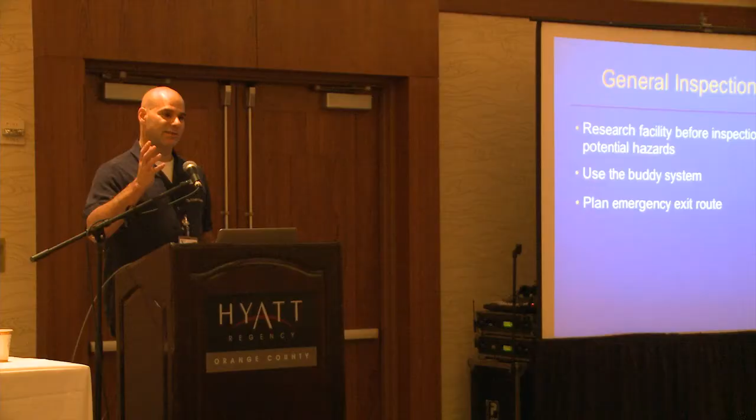My name is Victor Morales. I work for the Long Beach Fire Department. I am a hazmat specialist, business emergency plan inspector, CUPA inspector, and fire code inspector. We're going to continue with the APSA and fire code requirements.

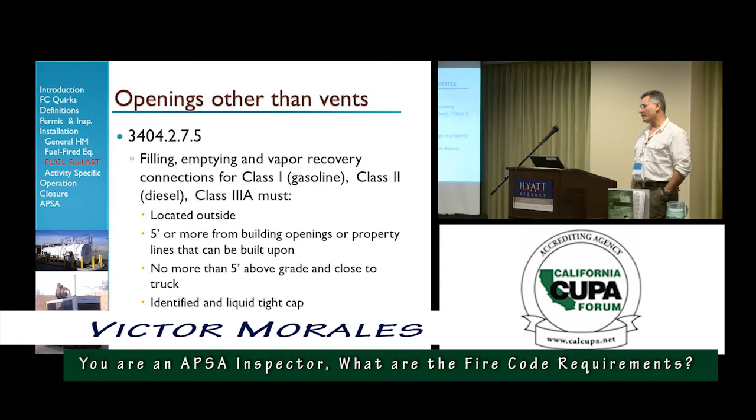Prior to starting my presentation, I would like to ask how many people here do actually perform APSA inspections? Oh, wow, quite a bit. And out of those that perform APSA inspections, how many of them normally work with fire code or issue fire code violations? Very few. Well, there are overlaps on APSA and fire code, but before going on, I would like to explain a little bit how the process works.

When you have a facility and they are going to install a tank, you have to understand that they need to go through a process, and that process requires fire code plan check. It will require a permit, just like Robert explained before. It will require those checks and permits, and then there will be installation, operation, maintenance, and testing. That is what the fire code does. And this is the big document, Fire Code 2010, that we follow.

There are specific chapters that apply to aboveground petroleum storage tanks. The way the fire code is written, they reference out different sections of the fire code. So, chapter 34, which is flammable combustible liquid storage, will say the design and installation has to comply with other chapter requirements or other standards as they see fit. Okay? Just to give you an idea, we jump around, section 3404.2.7.5, and you're like, whoa, what is that? Well, it's the specific sections that the fire code provides for everything: installation, operation, testing, design, etc.

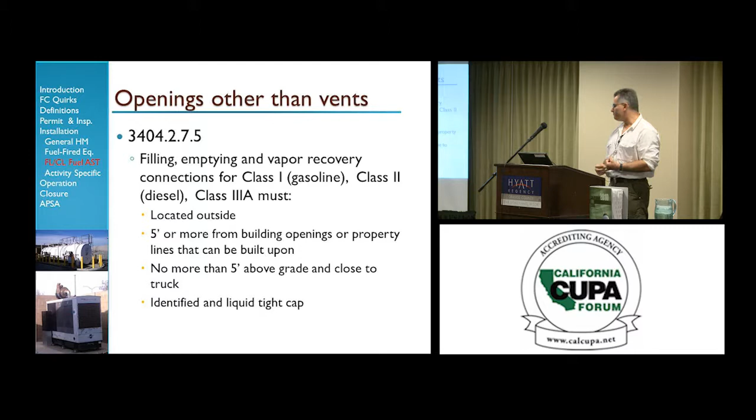Openings other than vents. As you can see, any aboveground petroleum storage tank will have a number of elements, ancillary equipment, not only the venting. It will be filling lines, piping, return piping that goes in and out, etc. All those elements are addressed in the fire code, and defined in several sections. These are the sections that we have.

Where's my pointer? Do I have it here?

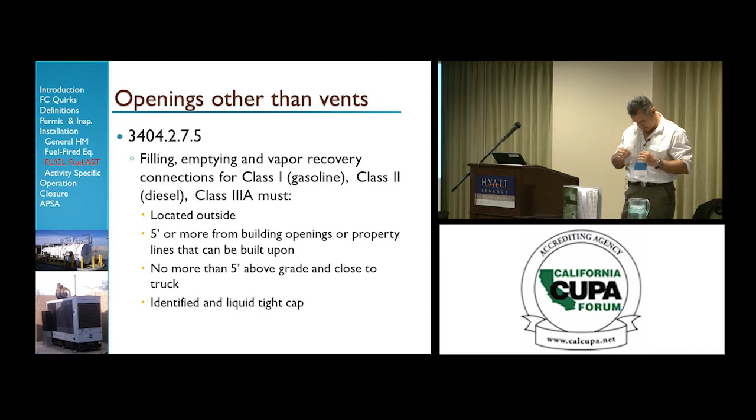Okay, thank you. These are the sections that we name throughout the presentation, and that's where you're going to see information regarding the specifics of the tank that you try to address. So, other than vents, you have filling, emptying, vapor recovery, connections for the type of material that you have, and these are the requirements.

Located outside, they have to be 5 feet or more from building openings or property lines that can be built upon, like Robert said. No more than 5 feet above grade, and close to the truck, identified, and with liquid-tight cap. And if you have other types of materials, Class 3B flammable liquids, it will have to be addressed in a different way. That chapter does that.

Okay? The fill connection is a drop tube with a gap to the bottom. The reason behind it is you don't want static electricity to build up when you're filling it and consequently have a problem. Protected tanks will have to have a spill container no less than 5 gallons with a drain valve. And the equipment, machinery, alarms, all that has to be listed or approved.

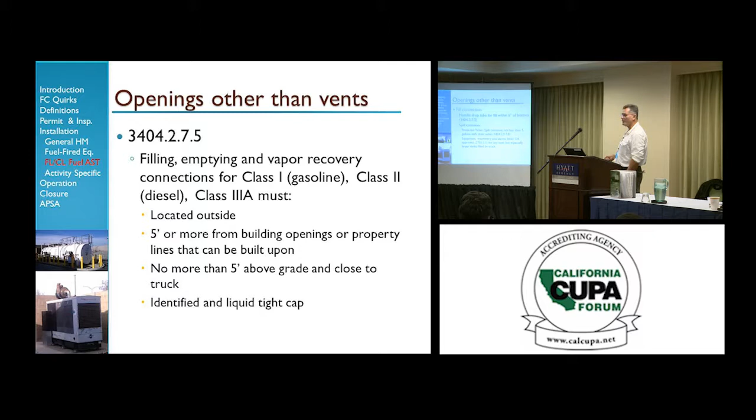And again, we reference out a different chapter. So chapter 34 will not tell you it has to be a certain way. It will be chapter 27. Okay?

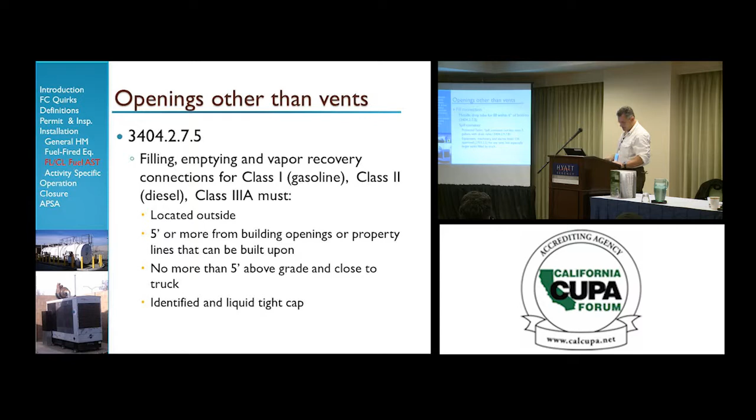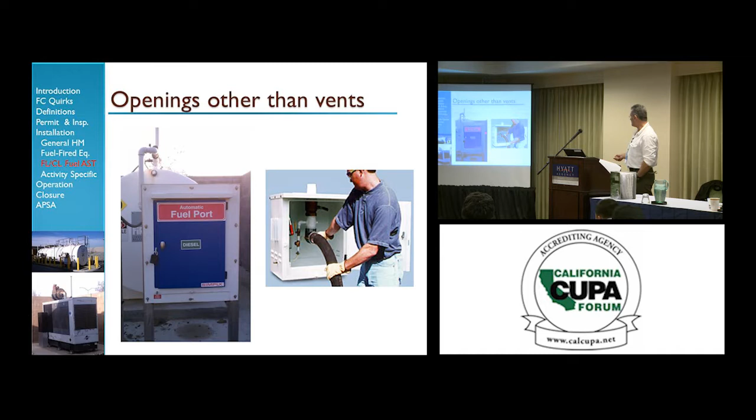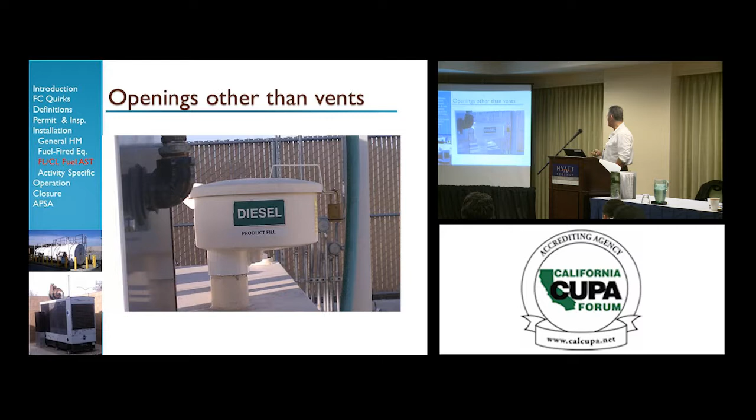Other openings can be fuel ports, connections, and you can see product fill line with the spill bucket, so make sure that nothing goes outside. And these are caps that are spring valved. On protected tanks, the fill pipe has to have a direct connection or cam lock. Those are the ears that you see in the connection.

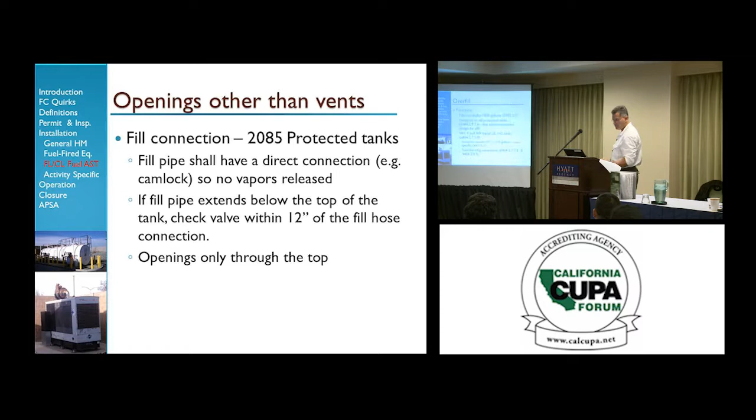Okay. If the fill pipe extends below the top of the tank, the check valve has to be within 12 inches of the fill hose connection. And the openings can be only through the top. Now again, we go back to chapter 27. It's required for hazmat tanks over 500 gallons. It might not be necessarily an APSA tank.

One of the things that I recommend you to know is the applicability of the APSA versus fire code, because chapter 34 deals with combustible and flammable liquid storage, but also has a section for underground storage tanks, which is not necessarily something that you may do.

This section requires it for all protected tanks, class 1, 2, and 3A liquids on UL 142 tanks, with the exception of tanks, aboveground tanks, with less than 1,320 gallons. Chapter 27 has more specific requirements on that. If they are connected to fuel burning equipment, these sections will apply to it. And again, here's the book. So you need to know where to go if you need to address any of those.

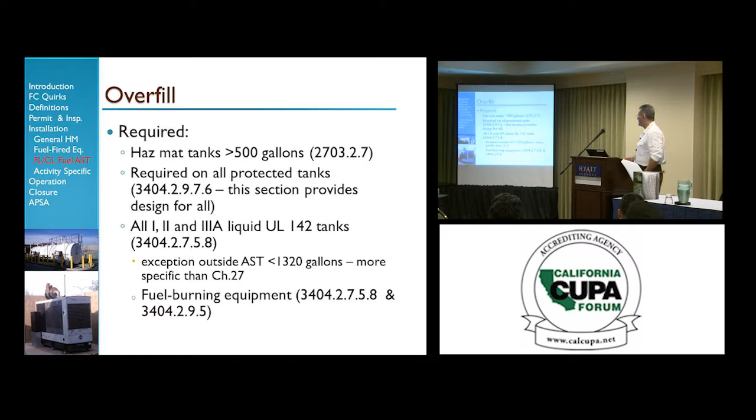Overfill protection. Overfill is required per section 3404.2.9.7.6. Okay, it has to have automatic prevention for overfill. 90% of filling will give you a notification. 95% shut off or slow the flow rate. Now that will be automatic. It can be an alarm, or it will have some kind of pressure build-up mechanism, so it slows down.

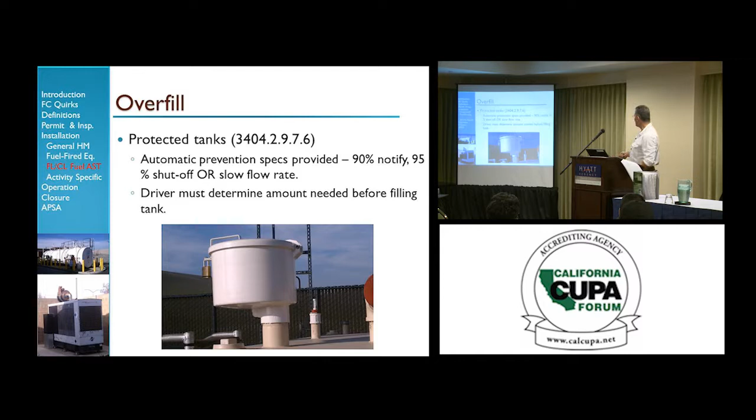The driver has to determine the amount needed prior to start filling, and he will do that either with a gauge, one of those gauge sticks that they use for it, or they have an automatic system to determine the amount of fuel needed.

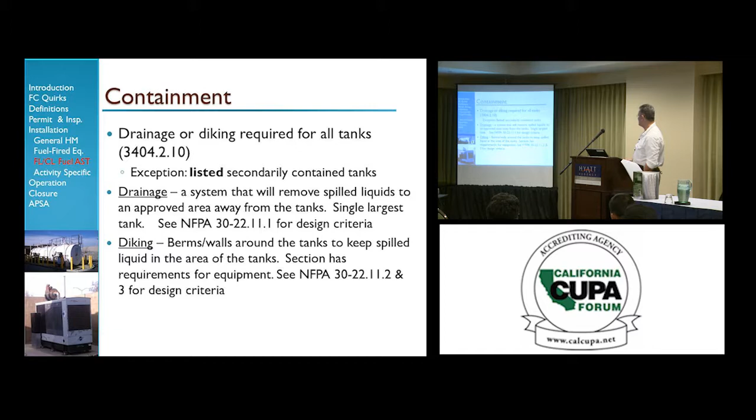Drainage and diking, it's required for all tanks except listed secondary contained tanks, because you have it built in. Now there is a little bit of a difference. The drainage will move any spilled liquid to an area away from where the tanks are, and the diking are berms or walls around the tanks to keep spilled liquid in the area of the tanks. And again, it has a different standard when it references out to how the diking needs to be for that particular site.

Secondary containment, it's required per section 2704 of the fire code on all protected tanks by section 3404.2.7.4 of the California Fire Code. And if it is indoors when the maximum allowable quantity is exceeded. And chapter 27 and chapter 34, they have tables where you can see what those quantities are. It has to be monitored, and it has to be specified for cases where the drainage is used.

If it is inside, we account for the single largest container and the fire sprinkler water. This is the section reference. If it is outside, it is the single largest container and 24-hour, 25-year storm water. In here, you can see that there might be a difference with APSA requirements. Maybe APSA says that outside it has to be the 100-year storm event, or things of that nature.

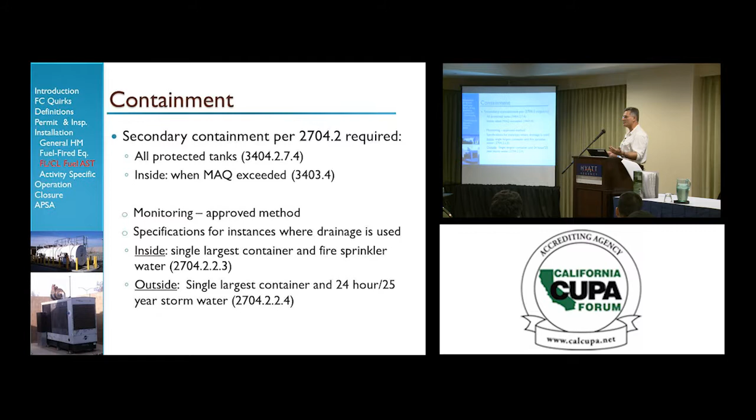We do not account for rainwater or fire sprinkler water when you have drainage or diking. However, for volumetric calculations on secondary containment, you do have to account for rainwater or fire sprinkler water to determine the amount needed.

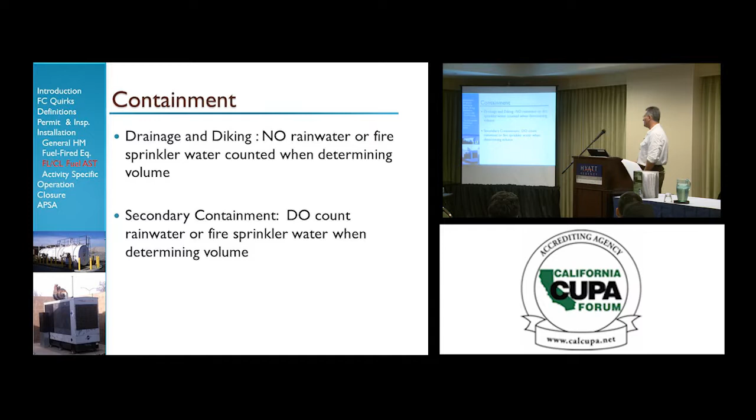H occupancies, high hazard occupancies, they do require spill control. It is required by the fire code. It will tell you how much spill control you need and what are the design criteria, etc. It has to prevent spills from entering other rooms or areas. You may have a facility where not the entire facility is an H occupancy. Only a portion of that facility may be an H occupancy.

So you may have a fully operating facility where only the section where they store the hazmat or their fuels is an H occupancy. And of course, it has to be permitted. It has to be plan checked by the fire marshal. Some of the design criteria is found in this section of the fire code. The piping. The containment is not required unless you are inside a building and you exceed the maximum allowable quantity.

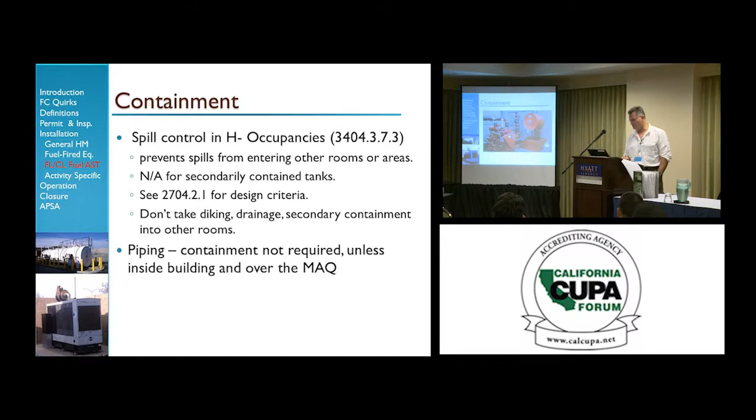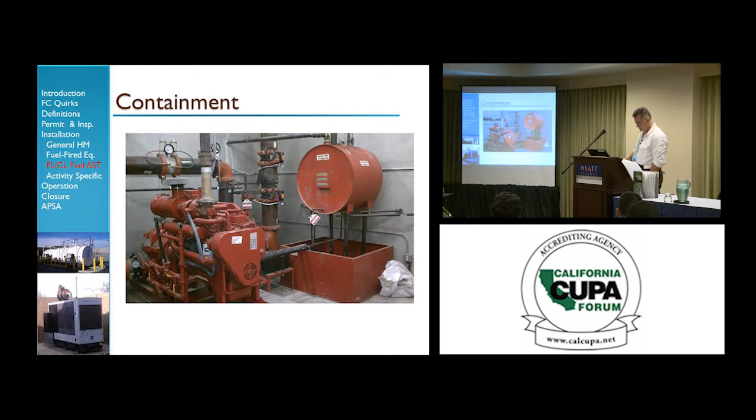Containment: I think we had a picture of this diesel tank, and this is the containment area. Piping systems. Okay, when it comes to piping systems, we follow the American Society of Mechanical Engineers standards. Again, it's not fire code, it's not NFPA, it's not health and safety code, it's not APSA. We follow this, and these are the ones that

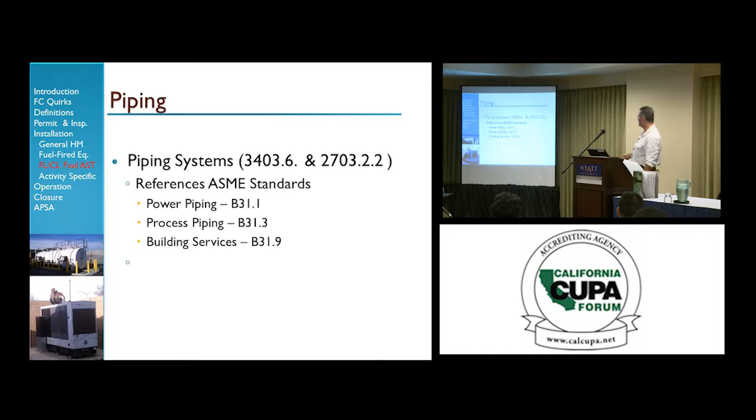are required. Metal: if the piping is made of special materials with a low melting point, then this section of the fire code applies. Low melting point will be copper piping, aluminum piping, brass piping, even cast iron. If they have a low melting point, then they will have to be approved by ASME standards, NFPA.

One of the things is I believe if it is underground, then it's okay. If it is above ground, then there is a table in this chapter where you can see if the piping system meets that standard or not. They have to be protected from fire. If there is leakage, you cannot expose people or structures, and the leakage can be readily controlled by a remote valve.

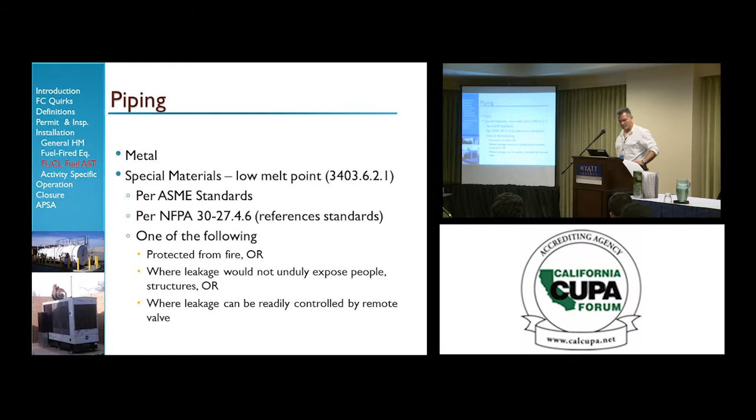Again, we go back to the piping systems. We're talking about the scheduling of the pipes. Now, if you are connecting those pipes, the fire code says it cannot be done in any way. It has to be according to certain sections. So if you're going to join those piping systems through welding, flange, threaded, they have to meet certain criteria. The flexible joints have to be listed. It cannot be just any piece of equipment.

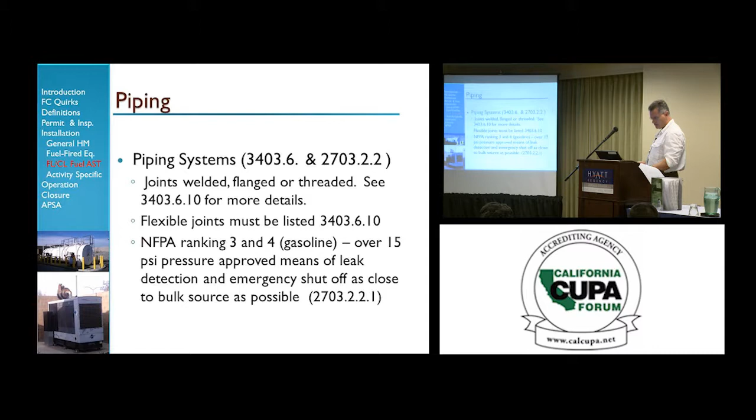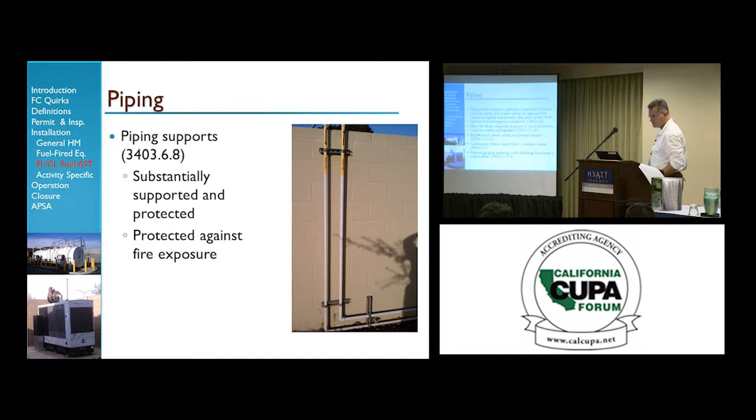And if you have liquids with NFPA rank of 3 or 4, then they have to have certain PSI pressure standards and leak detection and shut-off. The supports also have to be in compliance with this standard. They have to be supported, protected, and protected against fire exposure. And these are the supports. It has to have a number of manual control valves and check valves to operate the system properly and protect the plant under both normal conditions and emergency situations.

The shut-offs are required at point of use and source, must be visible and labeled as required by Chapter 27; backflow, as required by Chapter 27; connection below liquid level requires an isolation valve, and that's Chapter 34. So if you ever have to apply these standards when you do your APSA or fire code inspection, you are going to be going back and forth, checking.

All this probably will be done during plan check. Hopefully will be done during plan check. But it's not unusual that certain facilities, even some reputable facilities, install a tank without notifying the proper authority. And then your jurisdiction is the one that has to step in and make sure that all this is verified. We had a case in Long Beach where they installed a whole room with tanks, piping, et cetera, and they didn't consult with us prior to doing so.

Okay? Manual gauging inside a building has to have a check valve.

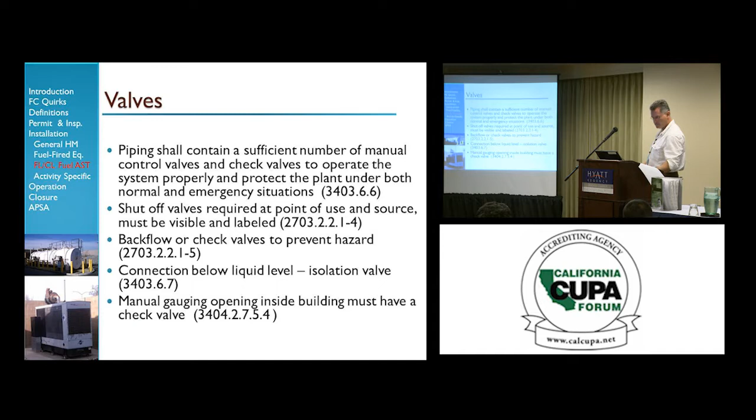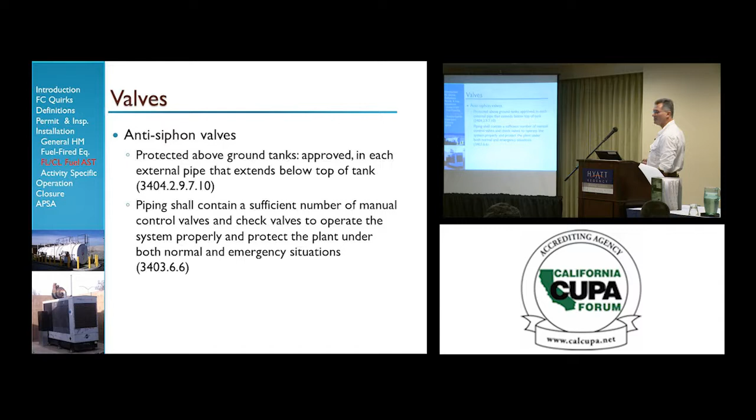Okay. Another part of that ancillary equipment: anti-siphon valves. These will protect tanks from getting product back. On protected above ground tanks, they have to be approved in each external pipe that extends below the top of the tank. And the piping has to have a number of manual control valves or check valves to operate the system and protect it during both normal and emergency situations. Let's take a look at it. So this is it.

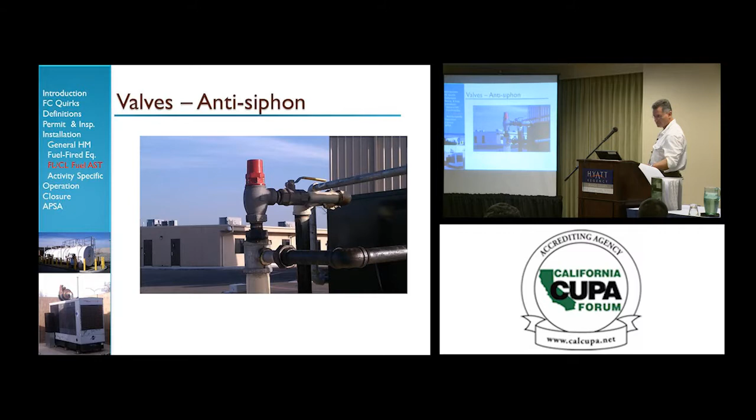Okay, so here we go. It prevents the flow back to the system.

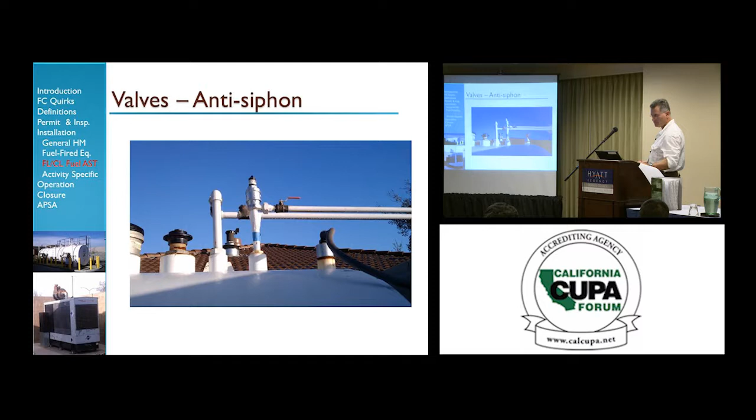Is it me? Okay, too fast. Well, let me see if I can.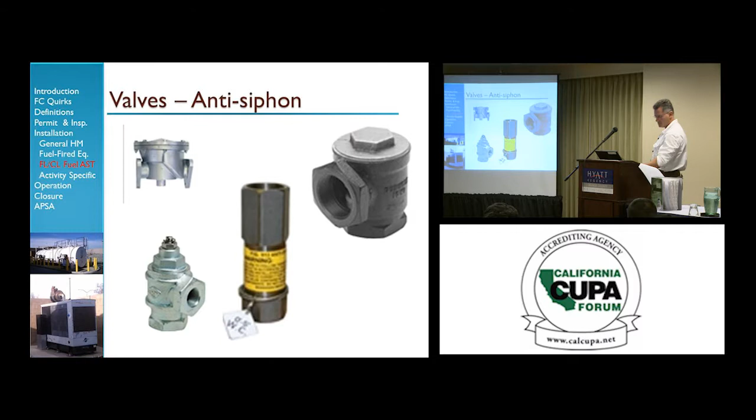And these are approved types of valves. Of course, tanks need to be labeled. You don't want to have any above ground petroleum tank without the proper labels on it. Fire code will require it. Health and safety code requires it, different chapters in the fire code. NFPA requires it. You most likely are familiar with the standard NFPA 704 diamond with the numbers that tell you how flammable, toxic, or reactive that material is.

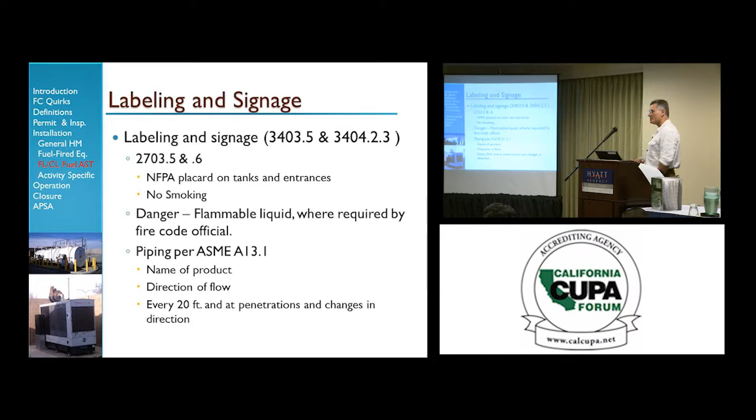In addition to that, the signs associated with those hazmats have to say no smoking, danger, et cetera. Again, we go back to the piping. It has to be according to the fire code and approved by the ASME standards. They have to display the name of the product and the direction of the flow every 20 feet. Also, if it goes through walls or changes direction, then you need to put signs on those.

Protected tanks. This is the standard that applies to it, and you have to have information documented on how you are going to fill that tank and the calibration of that tank. Okay, let's move it along.

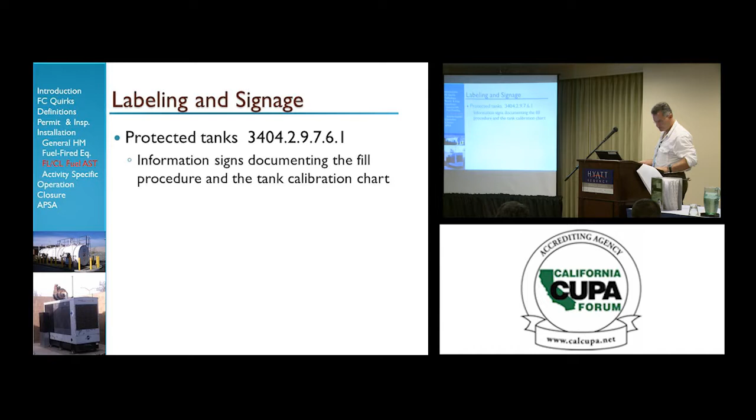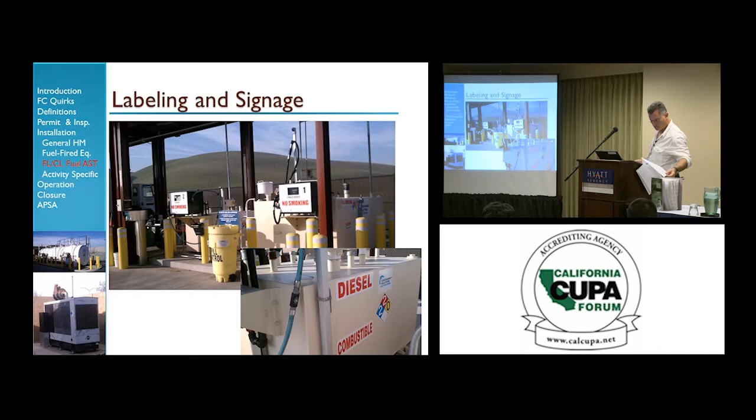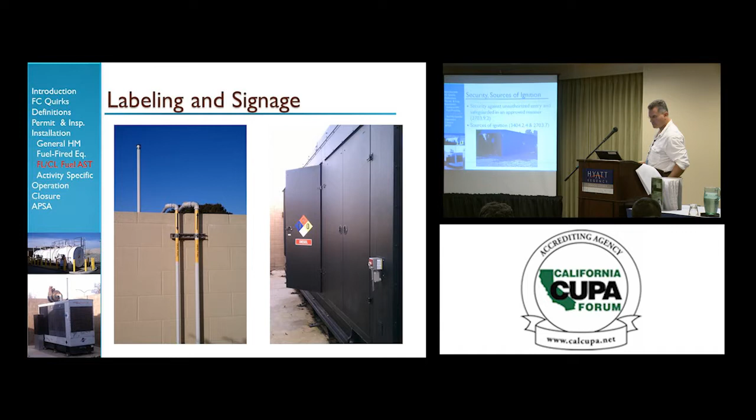Okay, product name, NFPA standard 704. In here you will have instructions, fill connections other than vents, etc. This is a typical above ground tank. Labeling for the piping, direction of flow, name of product, NFPA. They have to be secured.

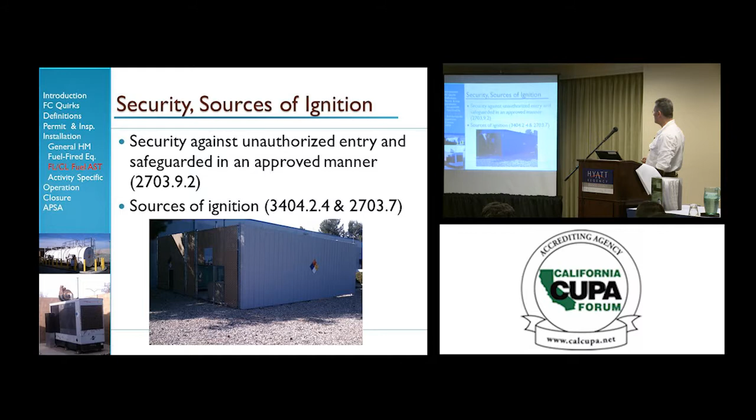Chapter 27 requires that if you have hazardous materials in above ground tanks, you have to have security around it to prevent unauthorized entry and safeguard. And it has to be away from sources of ignition, and these are the standards that require it.

Impact protection. Chapter 27 says all hazmat. So it doesn't matter if it is petroleum product or not. If it is hazmat, Chapter 27 says you have to have impact protection. Flammable and combustible liquid piping has to have protection as well, and protected tanks by this standard.

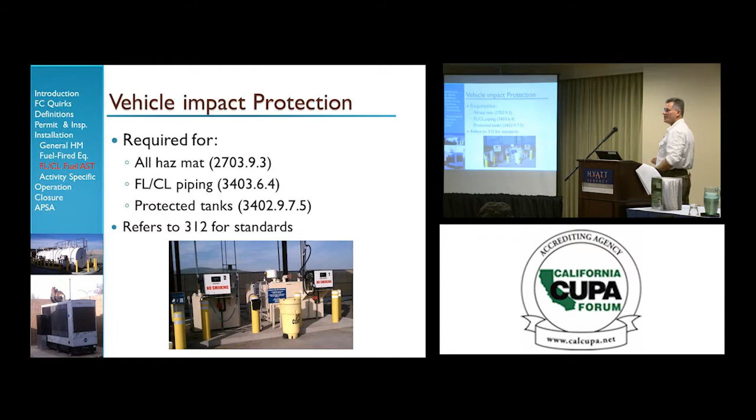Now, how high, how big, etc., you have to refer to Section 312 of the California Fire Code here. That will tell you the specifics of it. We have a slide on it. Okay, the post has to be steel, concrete filled, 3 feet in the ground, 3 feet above minimum. In Long Beach, we have a local ordinance that says our posts have to be 4 feet tall at a minimum.

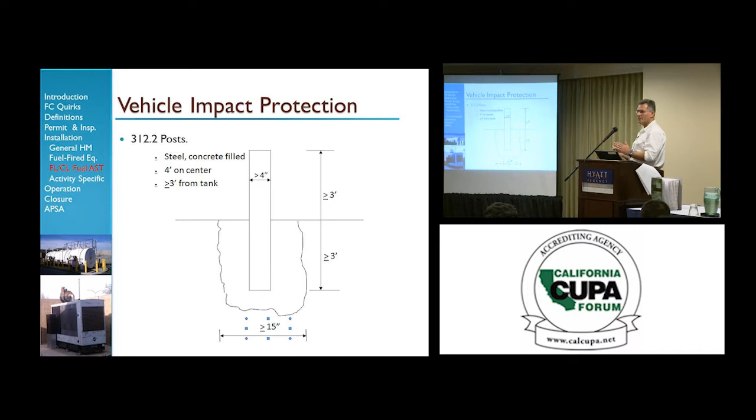They have to be 3 feet or more from the tank, and it's not here, but they have to be spaced at no more than 4 feet. So 4 feet or less. That is standard 312. You don't have to have posts. It's not mandatory, but you can have other barriers. But they have to meet this requirement.

They have to be a minimum of 3 feet, and they have to resist a force of 12,000 pounds applied at 36 inches. Can you beef it up? By all means. Like we do in Long Beach, in the marine terminals, we have top loaders that are tons and tons of weight and pretty big size. Those can be beefed up to withstand a much larger impact.

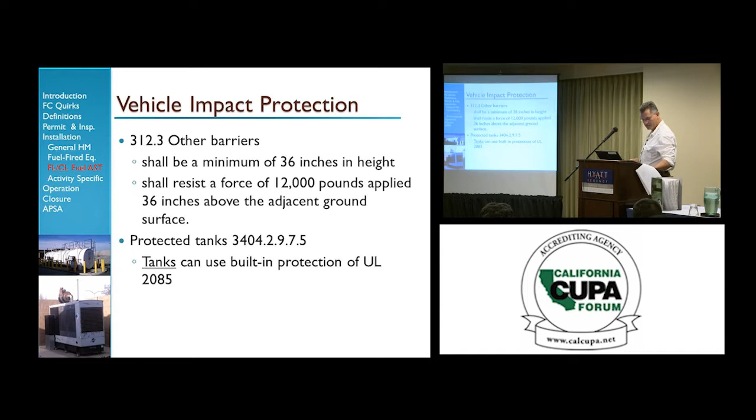Tanks that are protected can use built-in protection, and that will be the Convault, concrete filled coated tank. Now I dare you to go through this with a forklift. See if you can make it. But you can see that again. I don't have a reference, but it looks like it is more than 4 feet, 3 feet. So 3 feet will be the minimum, and then your city or county jurisdiction can beef it up to whatever they want, local ordinance.

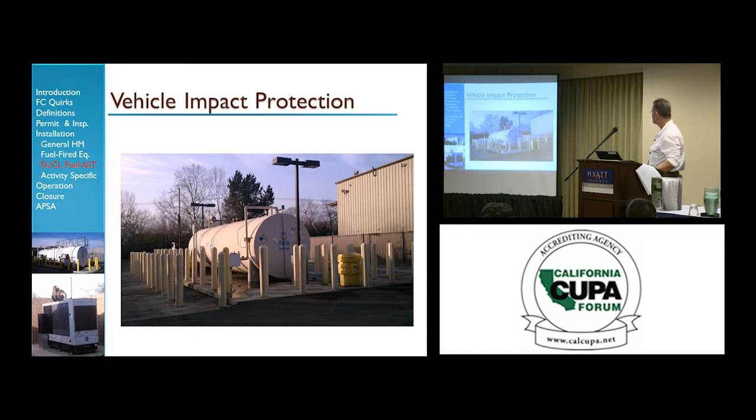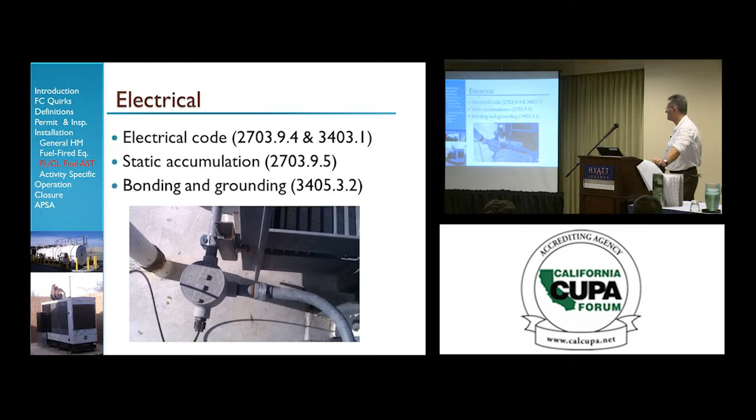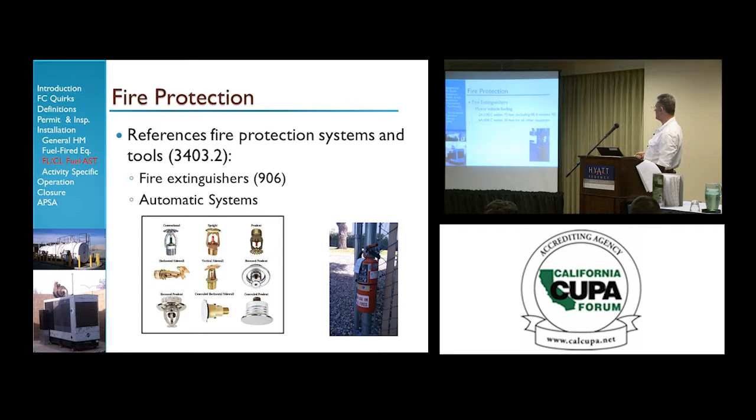Fire protection systems, as defined here, section 3403.2, fire extinguishers or automatic systems, fire sprinklers. The fire extinguishers have to meet section 906 of the California Fire Code. And it's going to tell you, okay, do you have motor vehicle fueling? It has to be within 75 feet for this type, or within 30 feet for this type.

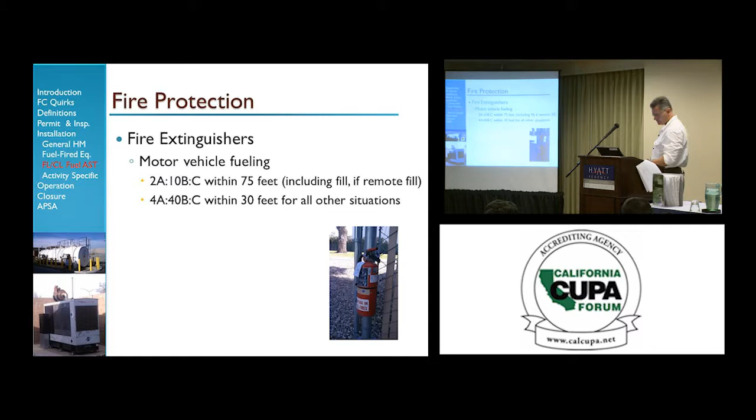Automatic protection systems are required by fire code, by Chapter 34, or your local jurisdiction. The determination of how much water depends on the occupancy. Obviously, a high hazard site is going to require a lot more fire water than a business occupancy.

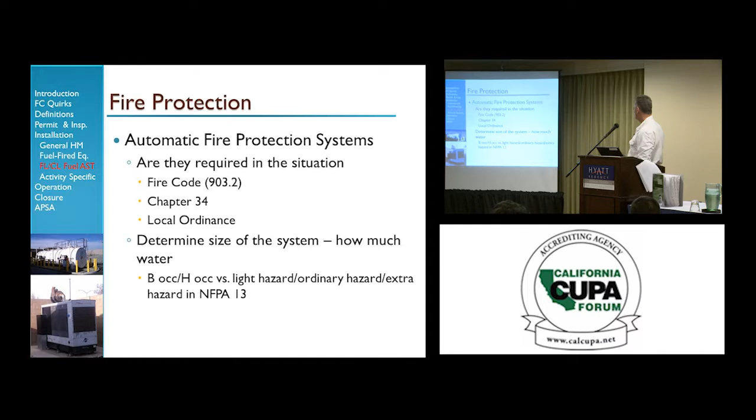And again, that goes through plan checking. Again, the plan checker will look at what kind of system they're going to put together, how much water they need. They will do the calculations. Hopefully they will do that. Your fire marshal will do that.

When you bring a new tank inside a facility, you might be required to alter your fire sprinkler system. You are bringing more hazmat to the site or more petroleum product to the site, and consequently the system that you previously had may not meet the standard that you need now, that you have 3,000 or 4,000 or 1,000 gallons of additional fuel material at the site.

If you modify it, you have to re-permit it, you have to re-engineer it, or maybe not, maybe your fire sprinkler system meets all the requirements. You never know, but it wouldn't hurt for you to verify if you need to alter that. Actually, not you, but the facility.

So as you do your APSA inspection and you have an SPCC, you got your PE certification, et cetera, you go, whoa, so this tank is brand new. Did you guys check with the fire code guys to make sure that your sprinkler system is capable of putting out a fire here or not? Food for thought. The change can be small or can be large.

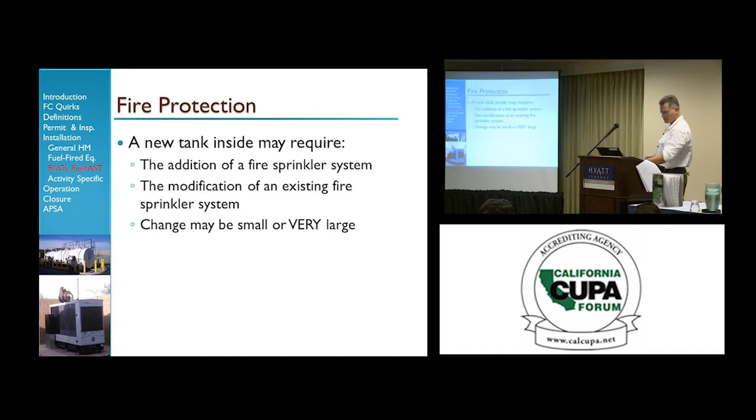Chapter 34 also has a section that deals with special operations. And then NFPA deals with fire pumps. Other chapters within the California Fire Code deal with specific activities within the state of California, aviation facilities or dry cleaning, semiconductor. So if you need additional information on how any of these operations need to comply with fire code, you can address it at these chapters.

Now, are these facilities APSA? I don't know. You need to know your regulation. You need to know if this is going to be an APSA facility or not. But there are fire code requirements for it, and they will be in these chapters.

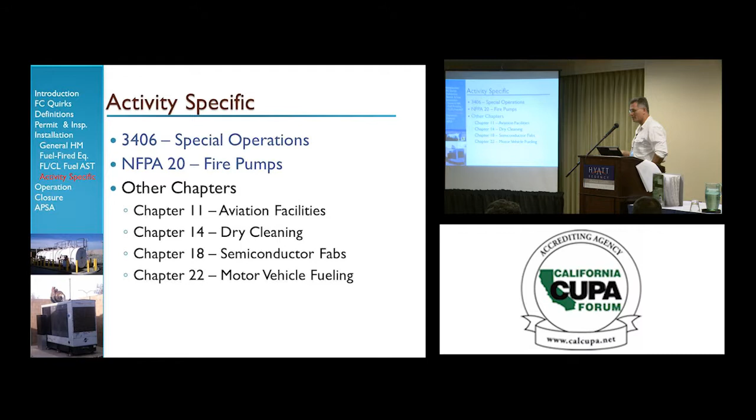Some of the special operations that we have in Chapter 34: farms, construction sites, well drilling and operations, bulk plants and terminals, transfer tank vehicles, refineries. I think we have everything in Long Beach. Well, everything but farms. I don't think we have any farms.

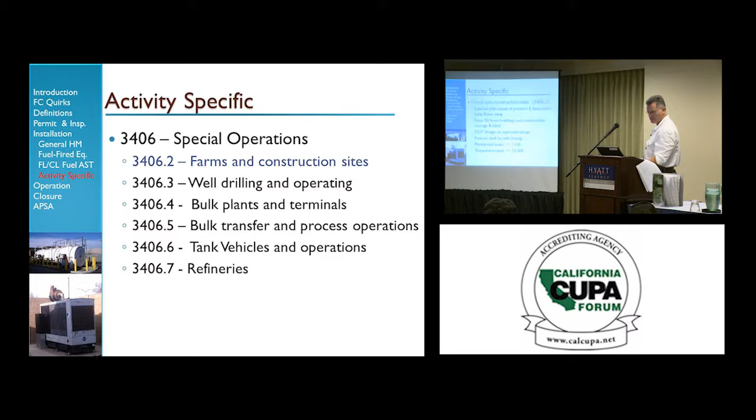So for farms, and we're going to go really quick through this farm thing, especially because I'm not a subject matter expert on this, but these are some of the requirements. They have to have labels with the product, flammable, keep away, 50 feet from buildings, combustible storage labels. If you have portable tanks, they have to be DOT designed or approved. The faucets have to be self-closing.

Permanent tanks, 1,100 gallons or less. And temporary tanks, 10,000 gallons. And you go, whoa, temporary tanks, 10,000 gallons. How come that much more? Well, the reason behind it is because farming is a seasonal activity. Wintertime, you get nothing. Summertime, you need to plow entire fields. So they bring machinery, equipment, et cetera, that needs fuel power.

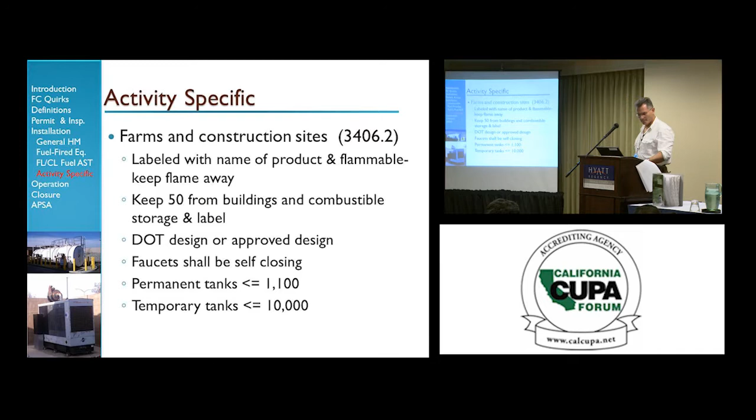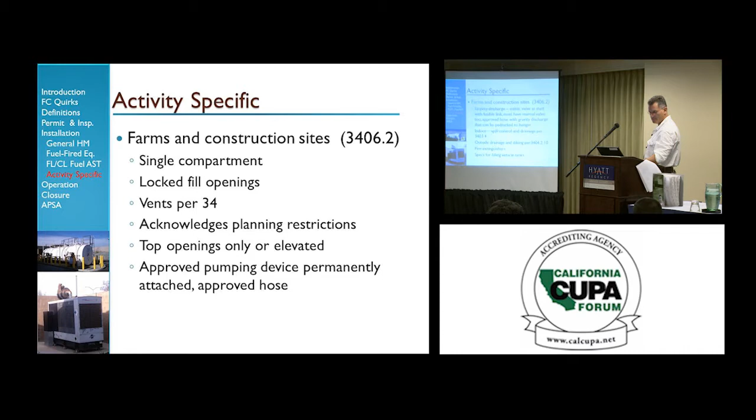Single compartment, locked fill openings, vents, as required per Chapter 34. Placement restrictions, you cannot do it right next to certain areas or certain buildings or certain occupancies. Top opening, and approved pumping device. Gravity discharge, have to be stable, valve at shell, fusible link, et cetera.

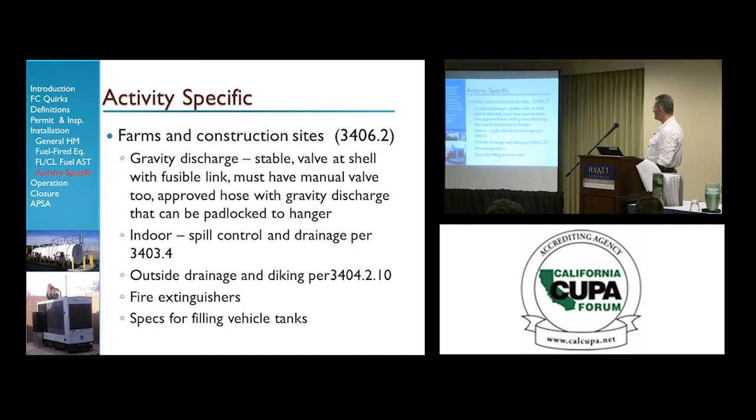Indoors, I don't know about this. I can picture maybe like silos or something like that where they store large quantities. They have to have spill control. They have to have fire extinguishers, and they have to follow specs for the vehicle filling tanks. Fire pumps, NFPA installation. I'm not going to go through that too much.

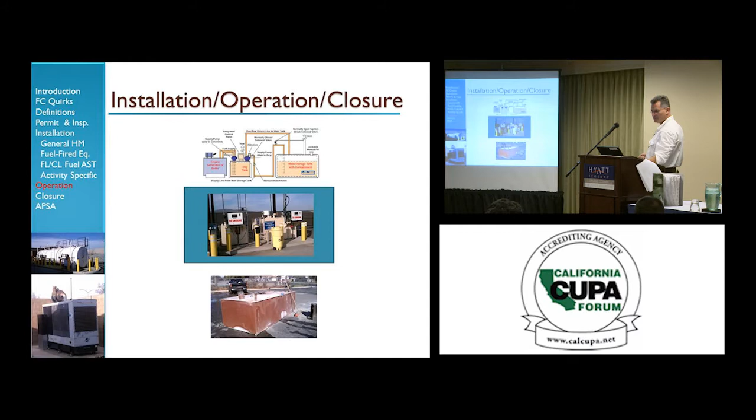Maintenance, operation. Chapter 27 and Chapter 34 also will tell you how you need to operate these sites where aboveground tanks are. They will tell you how to operate, conditions, maintenance, installation, design, etc.

I wanted to go back to the special activities though, because at some sites, at least we have a few of these in Long Beach, we require them to follow fire code, and as an APSA inspector, you can look for how many feet away you are from a school site, because these operations cannot happen at any time and anywhere. They have to be certain feet away from institutional or educational or certain facilities with occupancies.

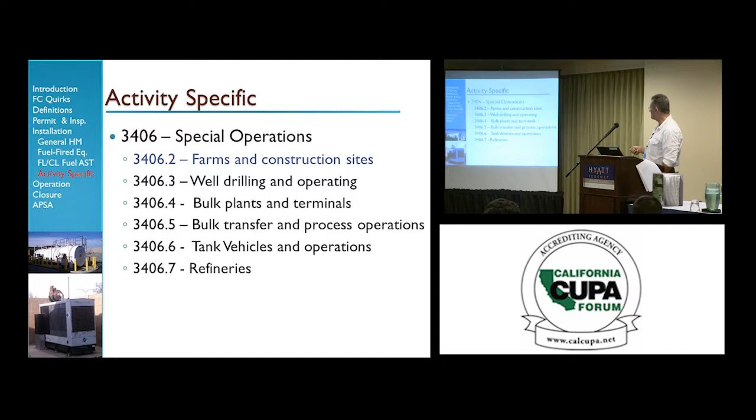Also, they have to be 100 feet away from buildings, etc., etc. If you have any of this, please go through that chapter and make sure that your site complies with these requirements. And now let's go to the operations.

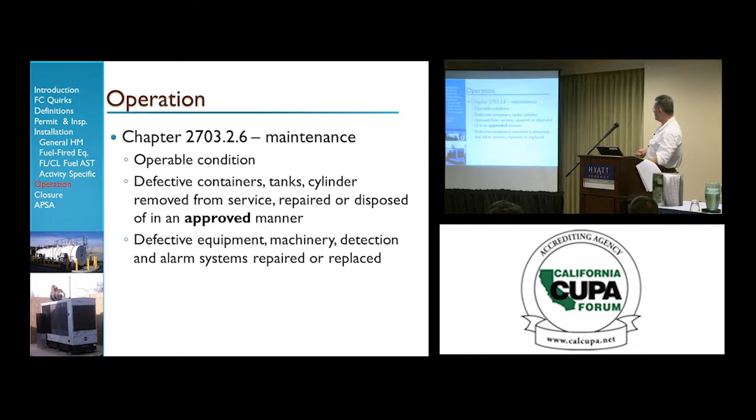So operations, you just cannot operate any way you want. You just cannot bring a tank full of fuel and start pumping any way you want. You have to do it in a certain manner approved by fire code. If you have defective equipment, you have to repair it, and it has to be approved.

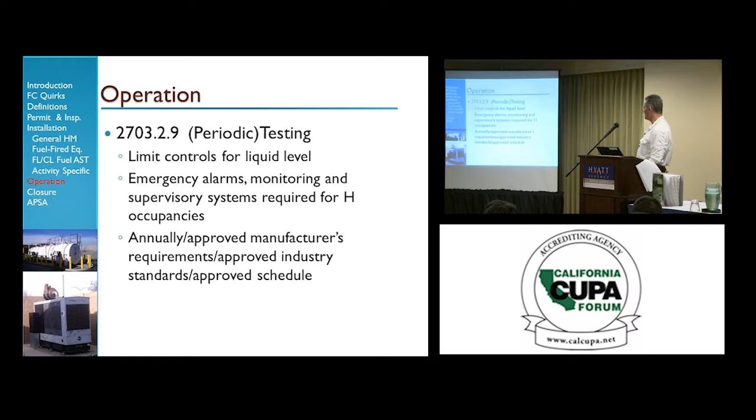Chapter 27 requires testing. So if you do have an above ground tank, you've got to have testing. You just cannot operate that tank without testing, making sure that it does what it needs to do. It requires limit controls for liquid level, emergency alarms, and it has to be according to the manufacturer's requirements. Okay. Annually, by the way.

If you change the contents, sometimes with petroleum products people do change the contents of the tank. Not every gasoline tank is always going to be a gasoline tank. Especially in oil production facilities, they may have crude oil, and then they may have cutter stock, and then they may have a lighter oil or light ends or things of that nature. So if you're going to change the contents of a tank, it has to be in compliance with the design, the construction, and the general installation for that particular tank.

Do I have a fuel tank and can I put corrosive acids in there? No, obviously not. It's not intended for that use, so you have to do it according to that. The fire code official, if they know that you're going to be changing the product, they may require testing of the tank to make sure that it meets the requirement.

And if you have a tank that holds flammable liquid, you cannot fill it with combustible liquid until you have drained and completely flushed that tank. So you just cannot mix diesel and gasoline in one particular tank without flushing and draining all the product that you had.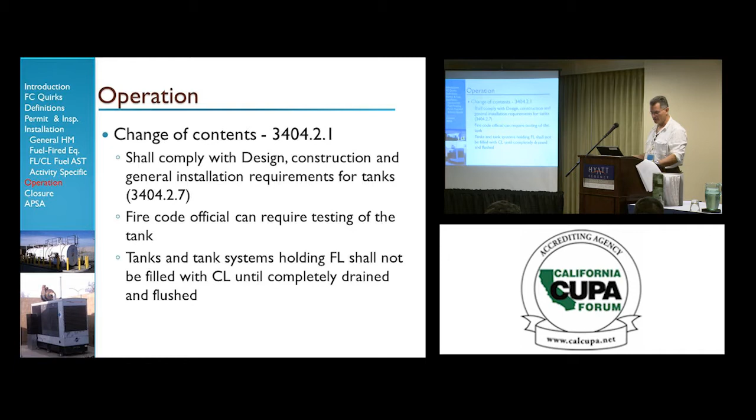The maintenance has to be in accordance with fire code again. There have to be safe operating conditions, maintained according to the listing of the tank that you have. If you have a UL 142, you need to maintain it in a certain way. If you have a 2085, then you have to maintain it in a different way.

If you have damage to your tank system, it has to be repaired using materials having equal or greater strength, or replaced or taken out of service. And we'll go through that in a little bit. And obviously you have to do that with manufacturer's documentation. Now, does the fire code require you to do it in a certain manner? Yeah, if you're going to do a repair or an alteration of the fuel tank, it has to be in accordance with NFPA 30, Standard 30, or Chapter 34.

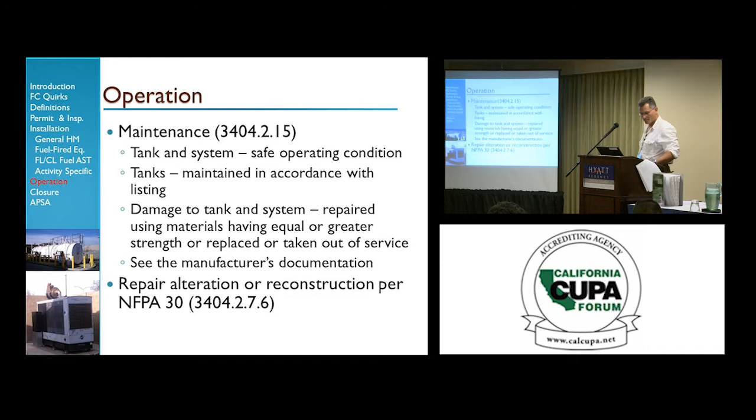General hazmat requirements. I don't like general hazmat requirements because I want to focus on the APSA portion of this training, but these apply to Chapter 27, which is hazardous materials, and not necessarily flammable and combustible. For flammable and combustible, you have to go to Chapter 34. Spill cleanup and reporting. There you go. You've got your APSA in there. I bet you that it overlaps at a certain point with this requirement. Personnel training, same thing.

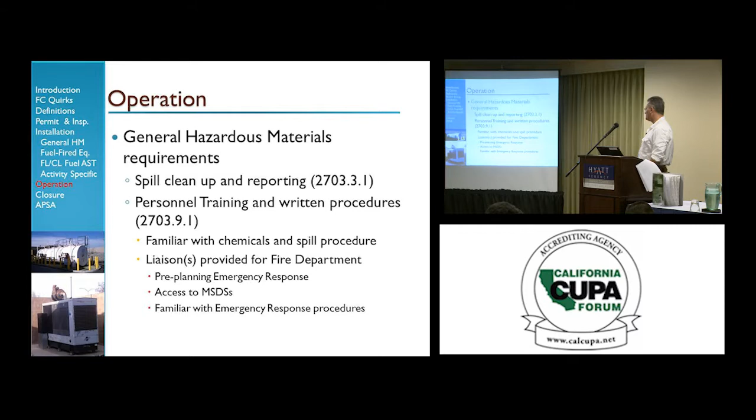Now, you have one of those sites where you're in Long Beach and corporate's in Ohio. And the emergency contact for that particular site in Long Beach is a phone number from Ohio. And you go to the guy and say, well, we have a spill here. What do we do? He goes, who are you? Well, that is why it is required that you are familiar with the operation and the materials that you have at the site.

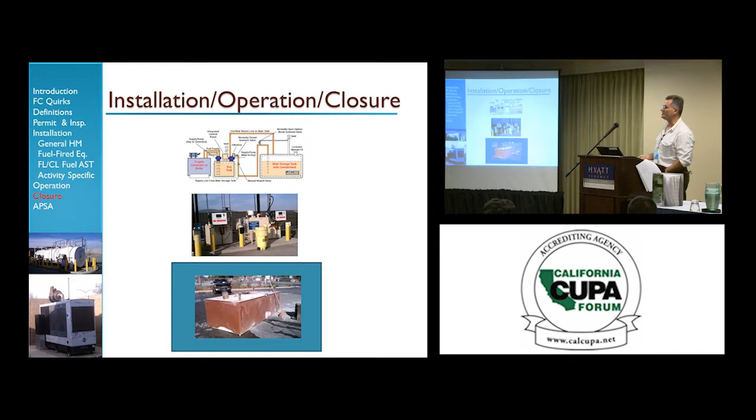Closure. If you're going to close a facility, you just cannot shut it down and abandon, unless you go to Mexico, but I don't know. You have to do it in a certain way. There is a difference between closing a tank or having a temporary out-of-service tank. You might not have to close that tank. You may have to fill it at a certain time of the year, and you may have just to temporarily close it or put it out of service.

You need to maintain the permit, obviously, because you will be required to have that tank permitted. You will have to have monitoring and inspections. If you're going to take it out completely, it has to be done in an approved manner. Don't just call a couple of welders and have that tank sliced open, because there are plenty of accidents that happen when someone is trying to cut a tank and they don't do it in an approved manner.

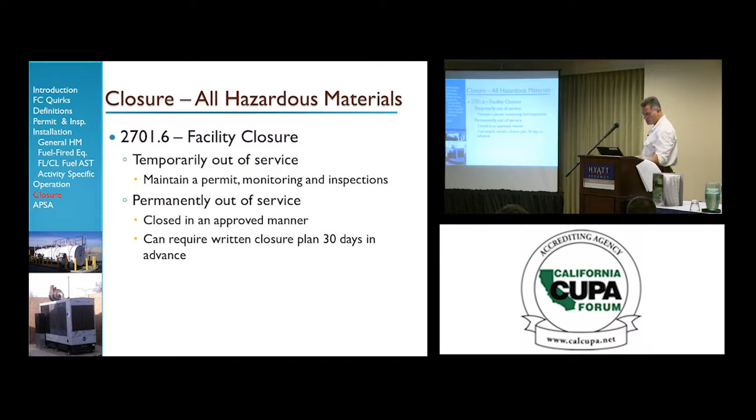You need to have a closure plan, in written format, and send it to the local CUPA or the jurisdiction that oversees the closure of the tank. Fixed tanks, or portable tanks over 660 gallons: you have to isolate the connecting lines and secure them if you're going to keep them out of service for more than 90 days. And if you are going to have that tank not in use for more than 1 year, you have to remove it.

Now, Chapter 34 gives you the exemption if you have a tank at an operating facility. So let's say that you have a 10-acre site with a power plant, and they have 2 reactors, 2 generators, and 1 tank that they no longer use. That tank will be closed forever. However, do they have to remove it? No, because it is within that facility, and that facility is still operating. So that's why this exception is given in Chapter 34.

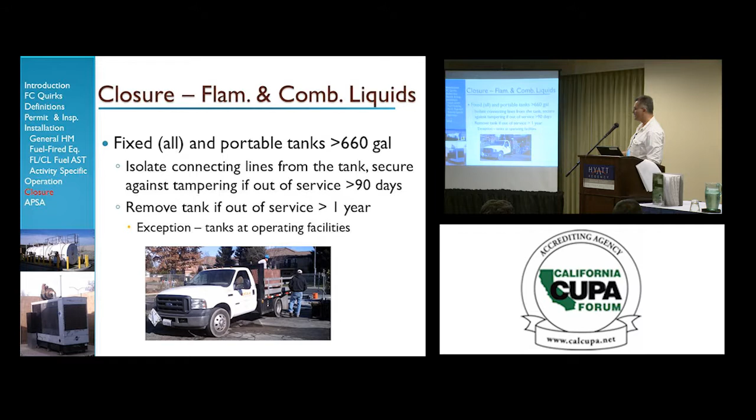The removal requirements, according to this section: typical safeguards, proper resale, disposal as hazardous waste, or on-site processing and then send it as scrap. That means you're going to have a closure plan approved, and you're going to say, yes, I'm going to hire such and such company. They're going to cut it out. We're going to take monitoring prior to getting the welders there. Everything will be contained, disposed, and sent out as scrap metal. That's fine.

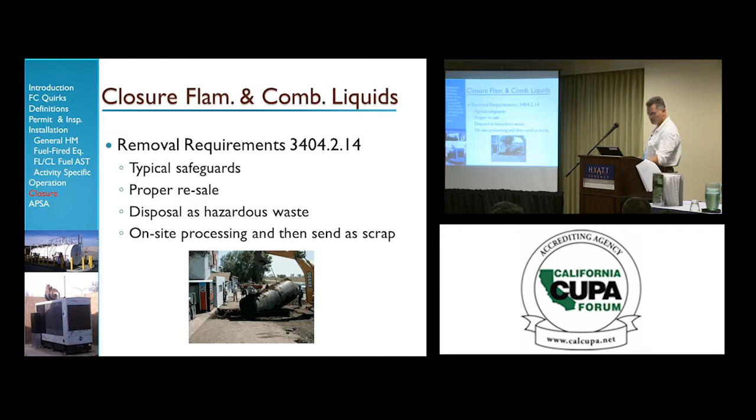APSA. A lot of similarities. I don't know a lot, but there are some. My advice to you is know very well what APSA requires if you are an APSA inspector. And basically, the whole point of this class is, if you are doing an APSA inspection and you see a tank that's brand new that doesn't have proper vehicle impact protection, those are the things. You don't have to know the entire fire code. That is a document for you to actually look at.

But if you do see something that triggers the alarm, well, how come this tank is not protected? How come this tank doesn't have emergency venting? How come this tank doesn't have certain elements that that guy in the CUPA conference told me? Well, that's what I want. That's what you want. So there are similarities. You're not going to compare requirement by requirement. You don't want to do that. And you should check both. Like I said, secondary containment might be calculated one way in the fire code and a different way in APSA, so use the most restrictive. Okay.

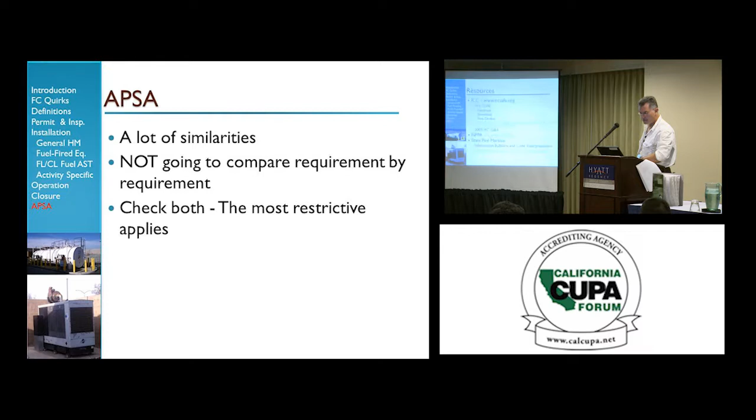These are some of the resources for fire code, free online. The NFPA website, and the State Fire Marshal laws and regulations website. So if you do have questions, you don't have to buy this. These are expensive. But you can get online and see what Chapter 34 says about something you might have seen during your APSA inspection. And that's about it for me.

Guys, off to lunch, almost 1:45. And I got a handout and everything. Thank you so much.